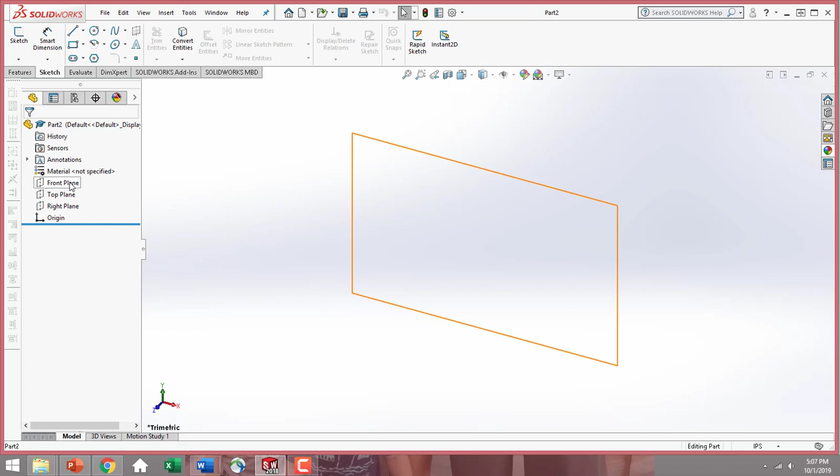So to begin, go ahead and open a new part document. Make sure your part window is in inches. Our instructions say we only need a 2D sketch, so we're not going to create an extrude feature from this. We're just sketching it. But we do need a sketch on the front plane. So go ahead and select that front plane and bring it normal to. Remember, always bring your planes normal to you so you're looking and sketching perpendicular to the plane.

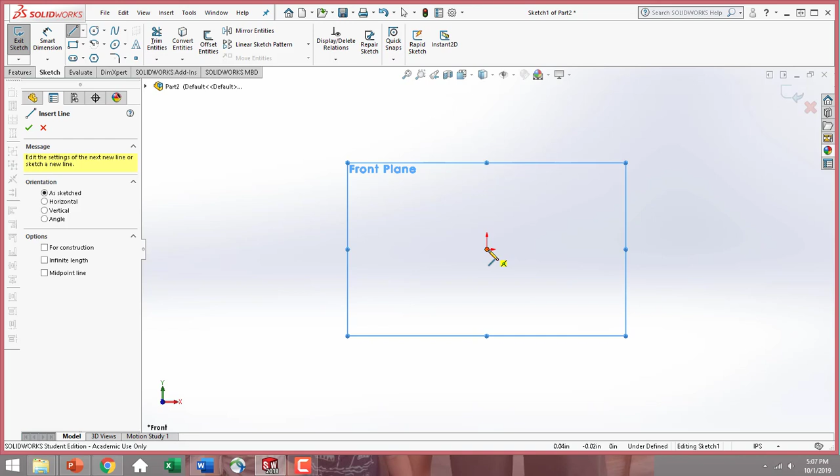Go ahead and open a new sketch, and I'm going to just select the line segment. Remember to always sketch from your origin so you are connected to a point in space. So I'm going to begin by just sketching a straight line here. Then I want a tangent arc. Instead of selecting a new sketch icon, I'm just going to do the shorthand. So bring my line segment back to that endpoint and then around, and I get that nice tangent arc.

I have another straight line up here, and then I need one more tangent arc, and then I'm going to stop with the sketch. Make sure they are going in the directions that you want. They don't need to be perfect at this point though. Now I'm going to go back to my line segment. So I just made the basic outline sketch of the top of that handle. So go back to your line segment, click down.

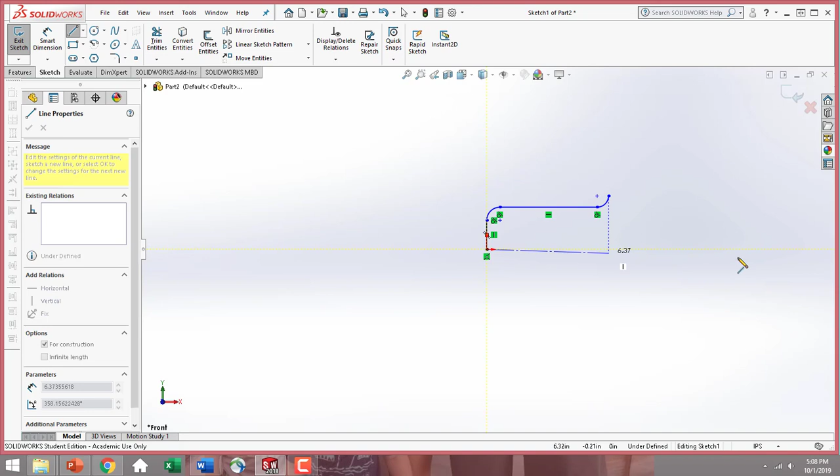Instead of selecting the line that we've been using, this would be referred to as an object line. It gives us these nice solid lines and creates our actual sketch. We're going to select center line. You'll notice when I place it down, I'm going to just connect it to my origin and bring it straight out, kind of to here, because I'm going to utilize the endpoint of it later on. But you'll notice that it has just dashes. This is our center line or construction line that we can use as a reference point.

Having it within our sketch is not going to affect any of our sketch relationships, or if we wanted to extrude this part, it wouldn't affect any of those features either. Whereas if we were just using that solid line that I used to outline this top of the handle and the rest of the part, the object line, if we put it in the center and then try to create an extrude feature from it, we would have a problem because we would have intersecting contours then, a sketch within a sketch, which you cannot have.

So when you need a reference point or reference geometry, you always want to use your construction lines or center lines because you can reference dimensions from them and how other lines lay and add in relationships, but they don't affect the overall feature or design of the part. So once we have our basic beginning outline and our center line, make sure that you have all these relationships that are showing up. So you should be connected to your origin, so have a coincident relationship from the endpoint of one of your lines. It doesn't have to be your straight vertical line. That line should be vertical.

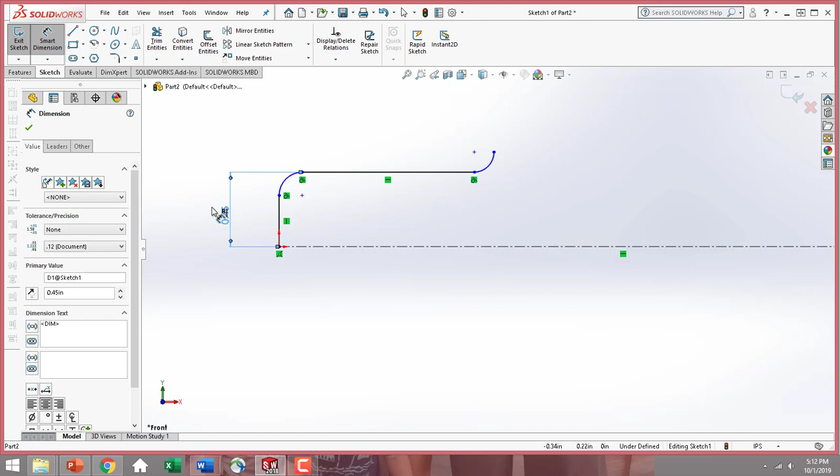Your dimensions do not have to line up the way that they do on your drawing. If you want them to, you can come over here on your Dimensions tab, go to Leaders, you can do a custom position and change that so they are lining up correctly. You can change how your leaders are displayed, but we'll get more into that when we start doing our drawing and documents.

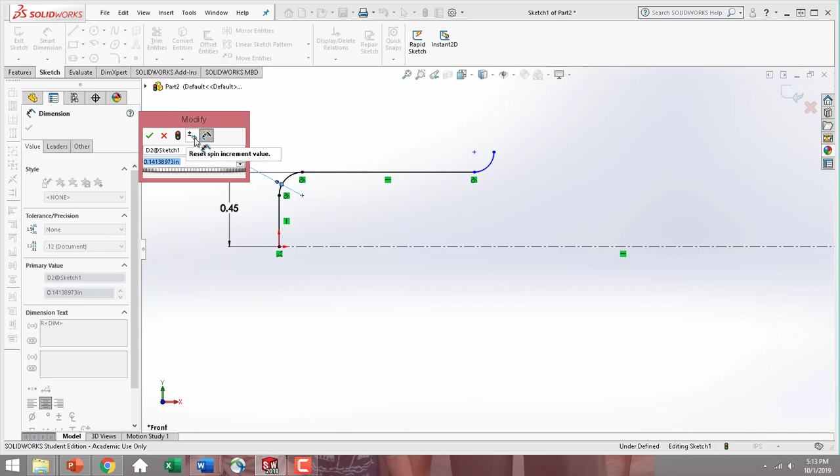Next, I'm going to dimension this top arc, which I can read from the shorthand 2 times the radius of 0.22, that both my arcs here are going to be the same, so it's going to be 0.22. So this bottom arc that will eventually be here will have the same radius. Then my inner arc right here has the radius of 0.15. So far I've just dimensioned what I have

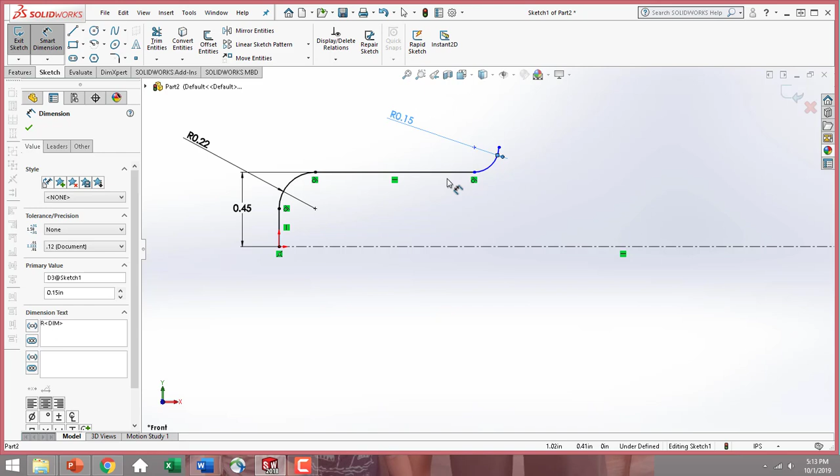sketched. So I'm going to come up here to my circle sketch icon. I'm just going to place 2 circles. Make sure your midpoint is on that center line just so you don't have to add in another relationship because we're attached there. I'm going to add in one relationship where I hold the control key down, select both my circles, and have them be equal to each other. So now I only have to dimension one. So I'm going to smart dimension. The diameter of these circles are 0.60.

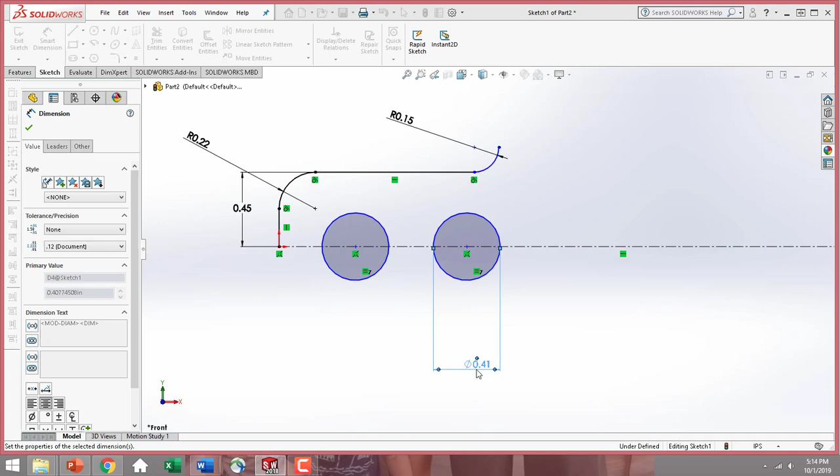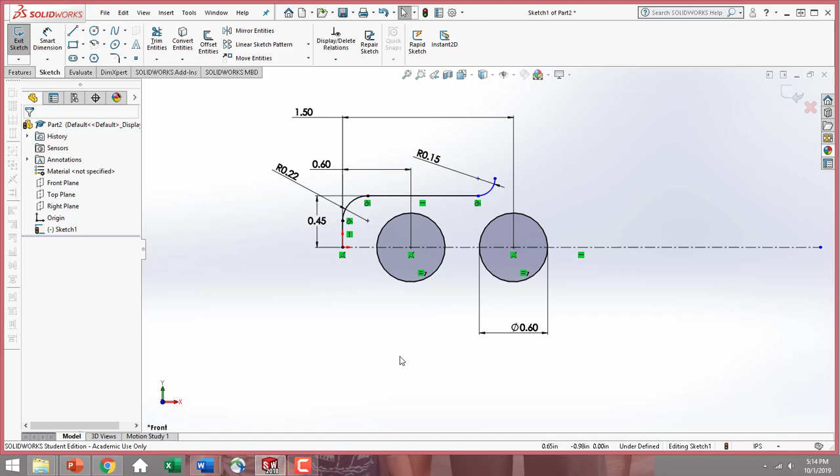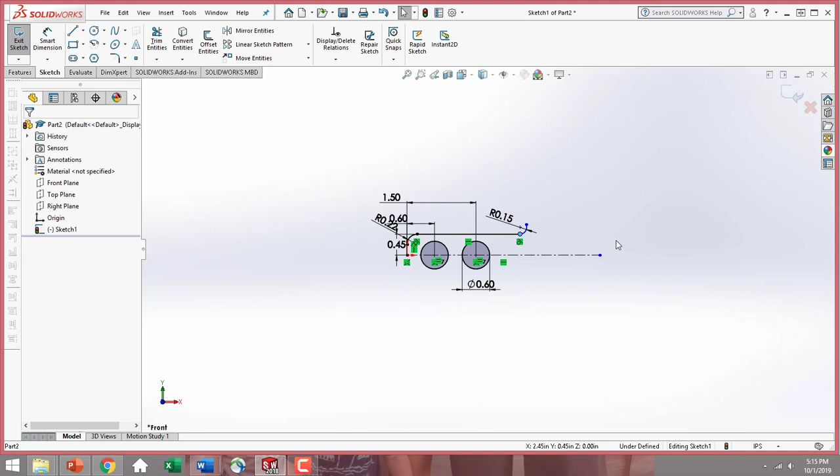Next, I'm going to dimension from the midpoint to the end line segment. This gives me that dimension of 0.60 as well. The midpoint to this end line segment is that 1.5. I'm going to hit OK. Since I know that this line segment comes out further, I'm going to just drag it out. If your curve gets too crazy, you can just bring it back around. It's not a huge deal right now. So far we're looking pretty good. I'm just going to zoom out so we can see a little better because now I'm going to start adding in my arcs.

Okay, so we technically have 4 arcs. You can see this tangent curve. It kind of looks like it goes into a straight line, but then in our drawing we see another arc right about here in the end of that handle. That is just showing that we're actually using a center point arc right here. So this tangent line goes into a center point arc and then tangents around. So I'm going to add in all my center point arcs right now. So go to your arc icon, go to center point arc. Now you can see when you're choosing your arc type, it shows you what points you're going to list first. So we're going to select where we want our midpoint and then our 2 endpoints.

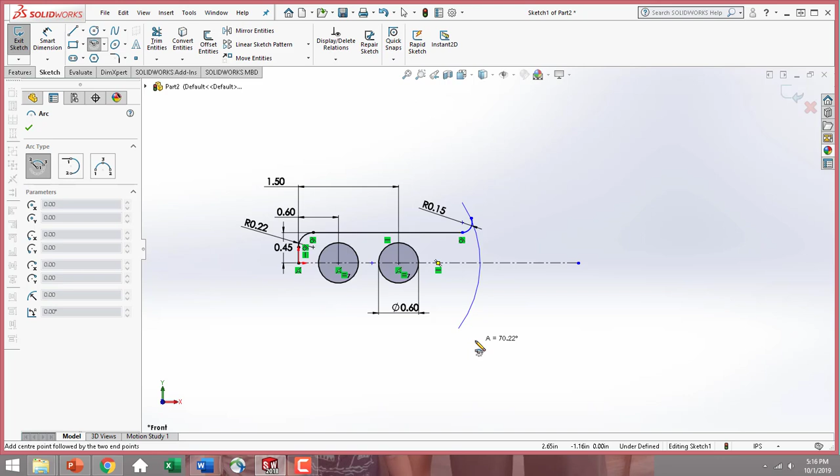So in this picture of your homework, all your radius and other dimensions are calling out your midpoint, which appears to be about right here in between your 2 circles. So I'm just going to select that down. Now I'm going to start with just this first line segment. So I think it's about right here, and then it's going to come around. So that's that arc I was talking about that kind of looks like a straight line. Now our second line segment, I'm going to go back to that midpoint and I'm going to use this for my midpoint on all the arcs. So now this is going to be the bottom arc on this interior cut.

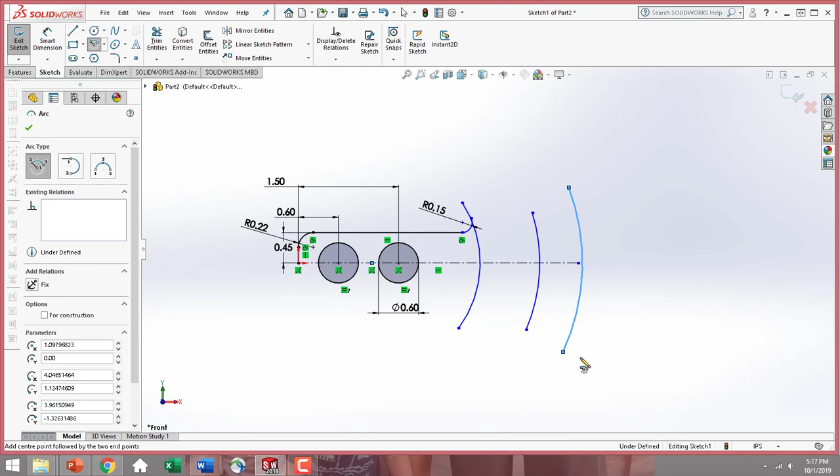Once again, go back to that midpoint. This is going to be the top arc on that interior cut. And last, go back to that midpoint, and this is going to be the top of our guide support. See how it wants to go backwards? You want to make sure that you're coming in the right direction. And hit OK. So now we have all 3 of those arcs. So make sure your midpoint is coincident with your center line, which it is.

Now we want to make sure all of our midpoints for these arcs are coincident with that line as well. So just hover over where you think they're going to be. SOLIDWORKS will automatically have them pop up. Hold down Control, select that center line and hit coincident. Then hit OK. We're going to do that for all 4 of them. So go ahead, add in that relationship.

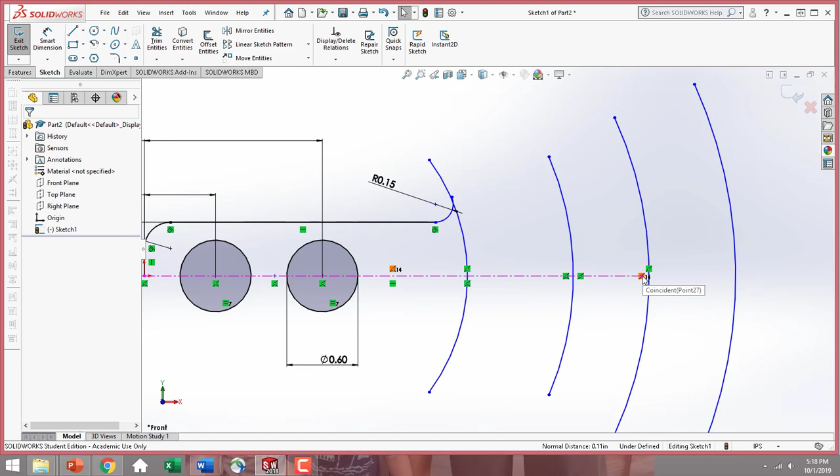You can drag out your center line if it is shorter than you want it to be. And for this one, I'm actually going to have the endpoint of my center line be the one that becomes the coincident relationship to the midpoint of this final arc.

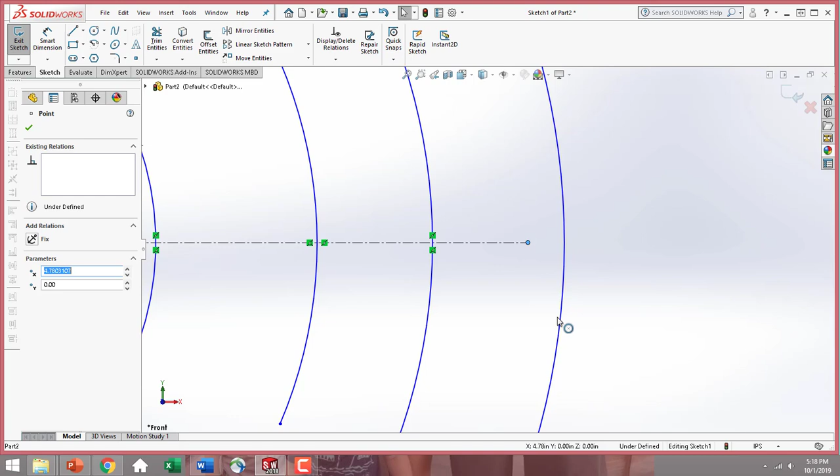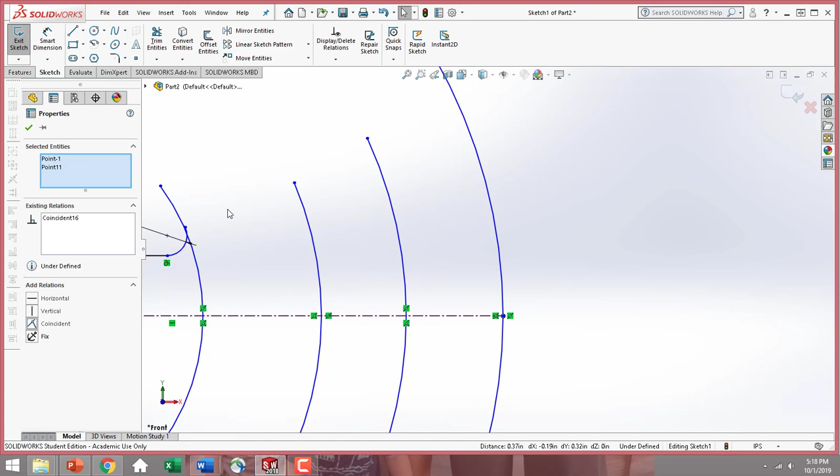Make sure you select the arc. I kind of have two arcs going on because I accidentally copied it, so make sure you don't do that. Select the midpoint, the end point of that center line, make them coincident, it snaps together. Just because it's cleaner, and now we can add in different relationships as well.

So we also want to connect the endpoint here to this bottom arc. So you can grab the endpoint and drag it and wait for that relationship to kind of pop up like it is, like SOLIDWORKS does. Hit OK, and now we don't have to add it in, but we are connected there.

Now you can come up to your Trim Entities tool. This is really handy for things like this where we needed an arc. So you can select the down arrow, go to Trim Entities. I'm going to use the Power Trim option. Then I'm just going to swipe through the line I want cut and hit OK. So it gets rid of that, but now I still have that nice arc coming up to my tangent line.

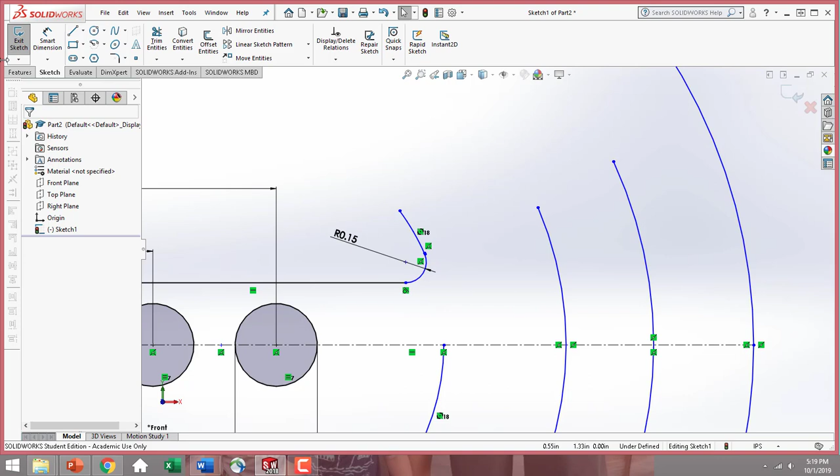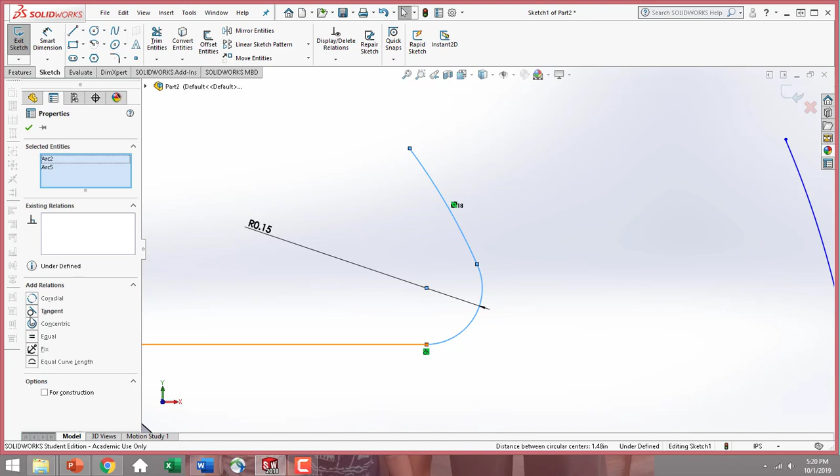I also want to make sure that my endpoints match up. So you can do that by zooming in, and that this arc has a tangent relationship to the arc we just cut. So add in that relationship as well. It's going to be tangent just so it always has that nice rounded curvature.

So you should have something that looks like this right now. Don't cut this line yet. So I'm hooked to my center line all the way through. I have all my arcs attached and everything's lining up nicely.

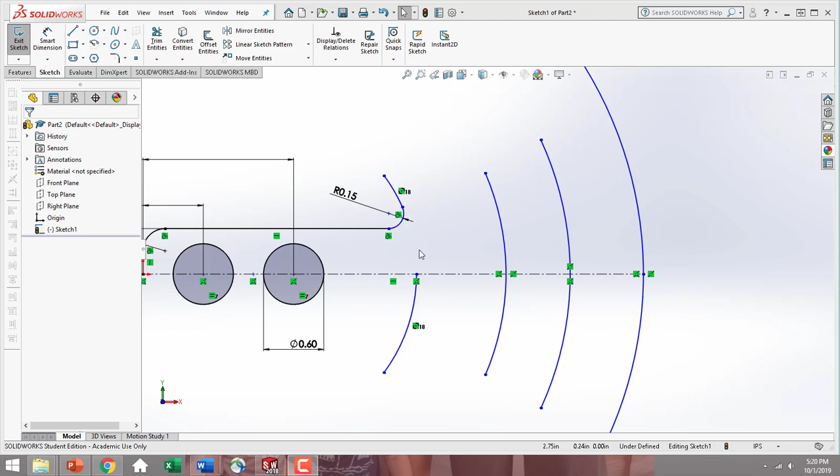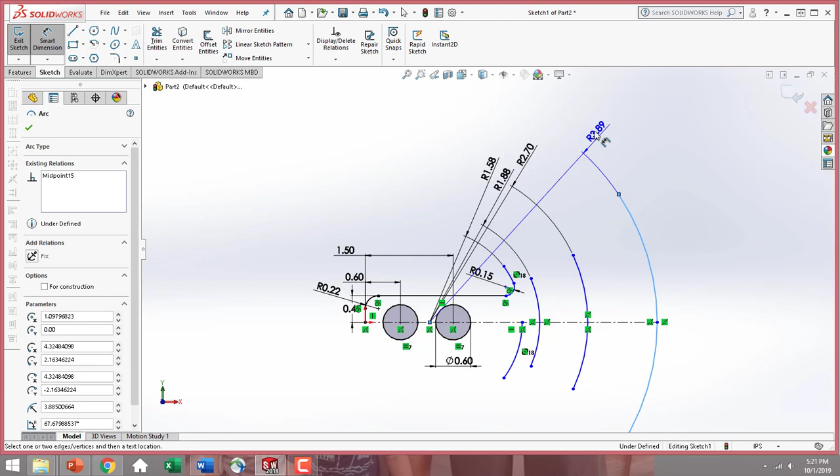Now let's go ahead and add in the dimensions of these arcs themselves. So I'm going to start with this bottom one. Its dimension is listed as 1.58. My middle is listed as 1.88. The top of that interior cut is 2.70. And then the final arc we have as 3.89, and hit OK. So now you can see everything's lined up neatly.

Go ahead and select all 5 of these arc lines now, since we already trimmed that away, and make them concentric to each other. So that means that spacing is always going to be equal, and hit OK.

Now I'm also going to add in one more construction line. So I'm just going to select my center line again. I'm going to draw it from that same midpoint I've been using. And this time I'm going to bring it up to about here. And just place it down. This is going to come into play when I finish up my interior and outside line segments, and how I'm going to put in that 30 degrees.

So let's go ahead and grab our line segment, and I'm going to start with the outside here. So hit that endpoint. Remember, we need another tangent arc here, so go back to the endpoint, create a tangent arc, then we have a straight line, then we have another tangent arc connecting them.

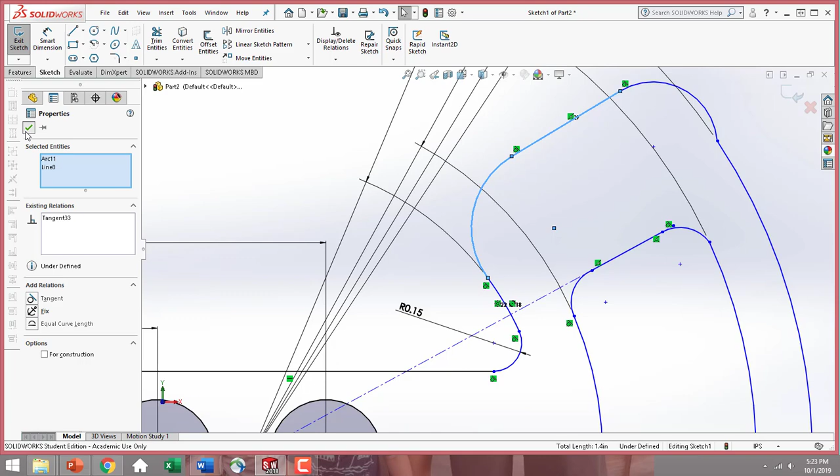So zoom in, and we're going to start on the outside. Make sure we have a tangent relationship on both sides of the arcs we just put in. So I need one on this side, so hold the Control key down, select both those line segments, select your tangent relationship. I'm going to get rid of this coincident relationship that SOLIDWORKS automatically put in. Sometimes we don't need the automatic ones. So we don't want to have any that we're not really paying attention to because it will mess this part up.

Okay, I have a tangent relationship here. I need one on this end, so select both those arcs this time, hit tangent, and OK. So you can see that flows smoothly together. I need to do the same thing to these interior arcs. So I'm going to add in a tangent relationship here, and one between these two top arcs.

Now that I have this line sketched, I'm going to add in one more relationship. I'm going to select the solid line I have sketched here, hold down my Control key, and select the center line. This time I'm going to select the collinear relationship, so those lines lie right on top of each other. You can also move your endpoint down to connect to this endpoint, just so you have a cleaner line.

I'm also going to add in a relationship between the outside straight line segment and my interior straight line segment for those two lines to be parallel with one another, and hit OK.

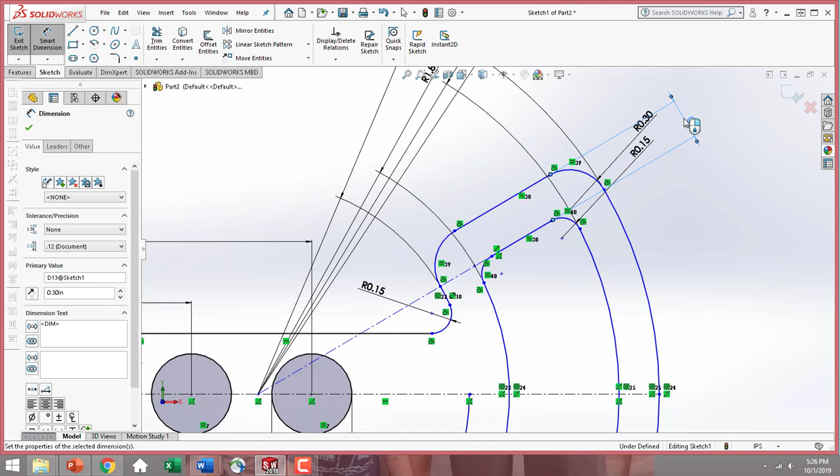Now I'm also going to Smart Dimension the width between these two line segments. Remember, you do need to make them parallel before creating this dimension, just so the dimension comes out straight and not at an angle, and is the true width. And this width is 0.30. You can read that on the bottom homework. Okay.

So you should be attached as well to that center line by the arc endpoint. So if it's not, you can select it, hold down Control and select that center line, make the coincident relationship. I already have it connected, so it's saying I'm over-defined.

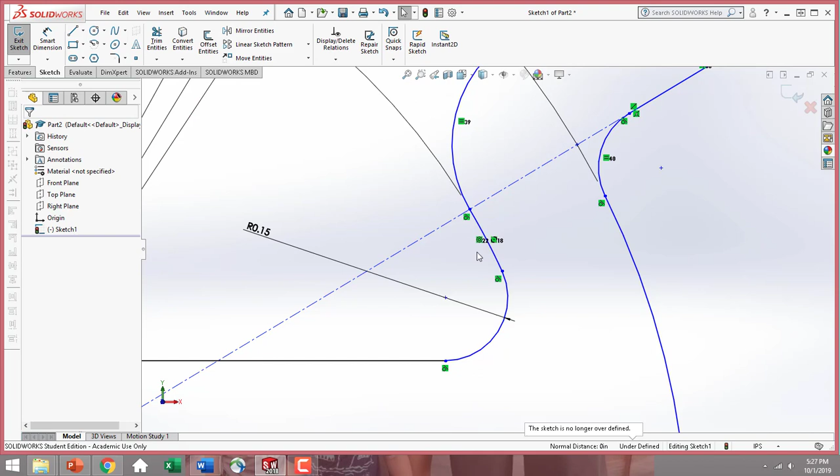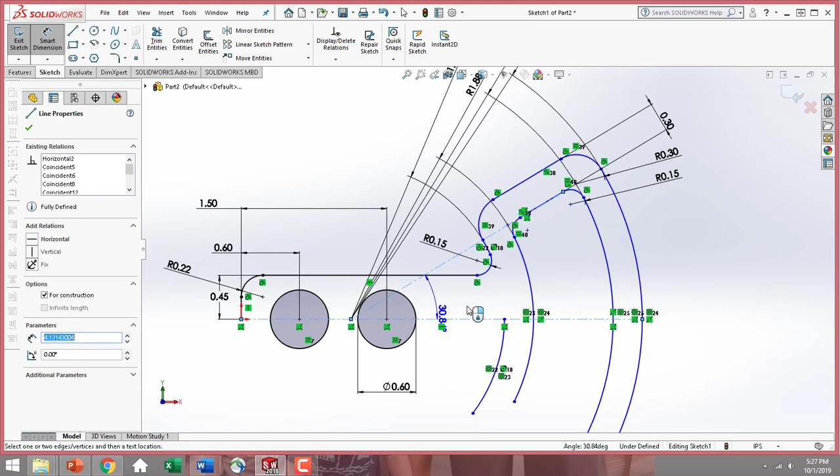So now we want to add in that 30 degrees, and that's where our two center lines are going to come into play. So go ahead and go back to your Smart Dimensions. Remember, when adding in an angle, you need to select the two line segments you want the angle in between. So select both of your center lines and drag that out. It's going to be 30 degrees and hit OK.

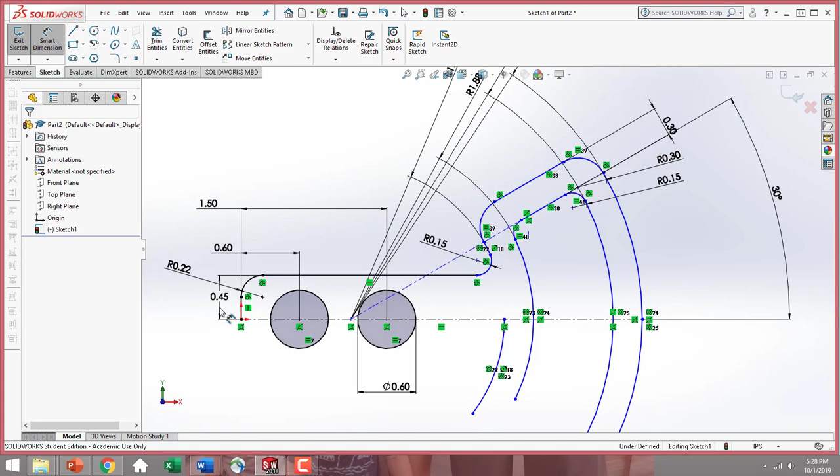So in the beginning, when we started dimensioning our circles in the first part of our handle, we left off that 1.12 dimension. Let's go ahead and add it in. So go back to Smart Dimension. You can zoom in. We're going to dimension the midpoint that we've been using for all these arcs to the end line segment. Remember to select the line segment and not the midpoint of it, because you'll just be in trouble then. This dimension is 1.12.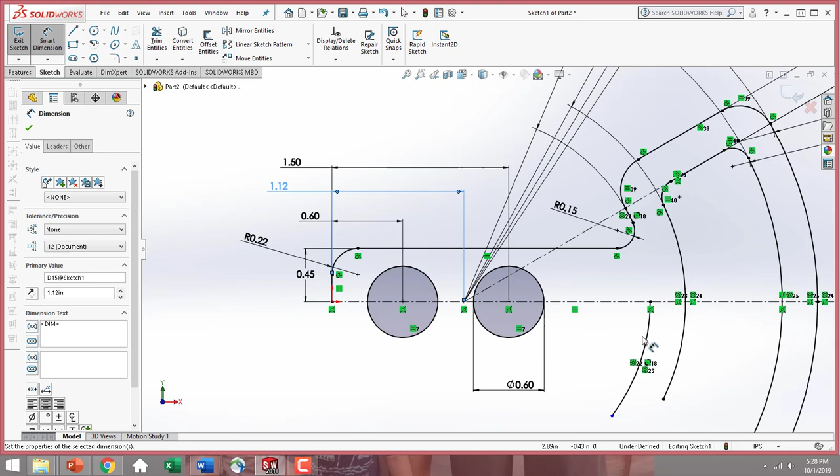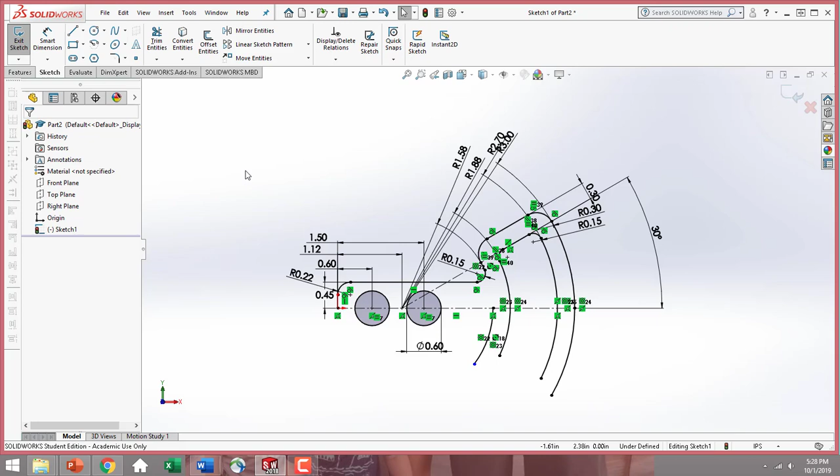And hit OK. So if you're reading from the left over on your homework, you'll see we have all the dimensions that have been given to us. By adding in that 1.12 dimension and giving my midpoint placement, the rest of my drawing has now become fully defined. So now the cool thing, we only had to draw one side and dimension it all. So let's go ahead and mirror it.

So go under your sketch tab, go to your mirror entities icon and work your way down on your feature tree manager. So to begin with, what entities do you want to mirror? So I want to mirror this straight line, my arc. I'm just going to go around the whole outside of my part. I do not need to mirror this line, however, but you can if you'd like, because I do have it still here.

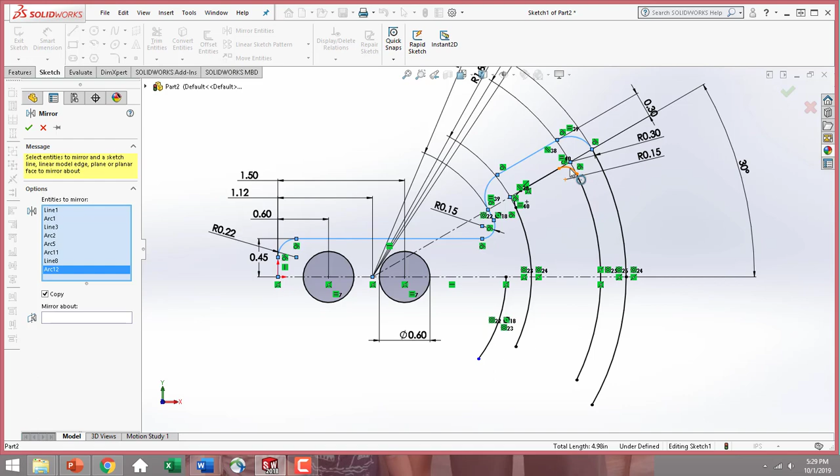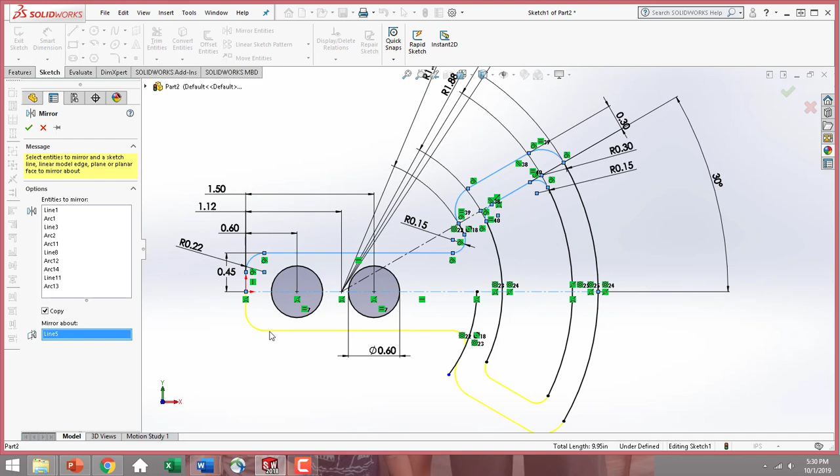I'm going to select it just so you guys can see. I don't need to select this outer line or this line because they both go to each side. I'm actually going to unselect that. So you can see I've just selected all these top outer lines besides the arcs I've already created. Now mirror about. This is another point where your center line comes into play. So select your mirror about, select that center line. You'll see just a preview of where those lines are going to be and hit OK.

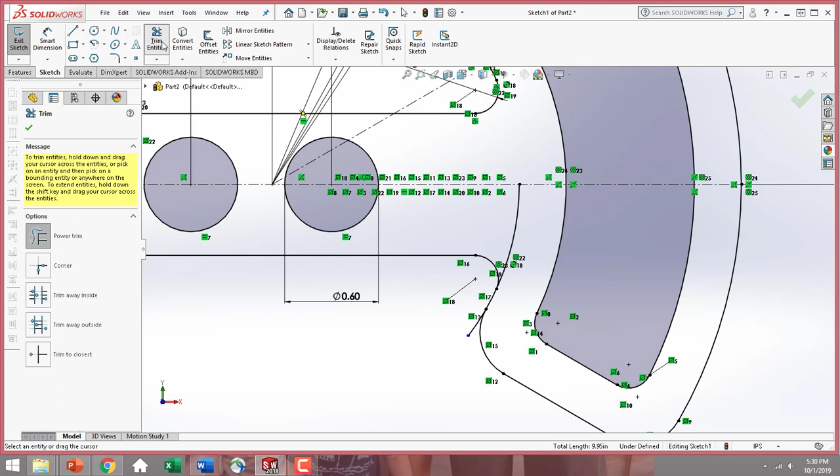Now you get all these crazy squares pop up for relationships. That's just showing that we did mirror those entities. So come back in because we do have these extra lines. Go to your trim entities icon, select it, make sure power trim's there, and just drag your mouse through these extra lines. And now we have a nice clear sketch that's fully defined. You can read on your status toolbar that it is fully defined.

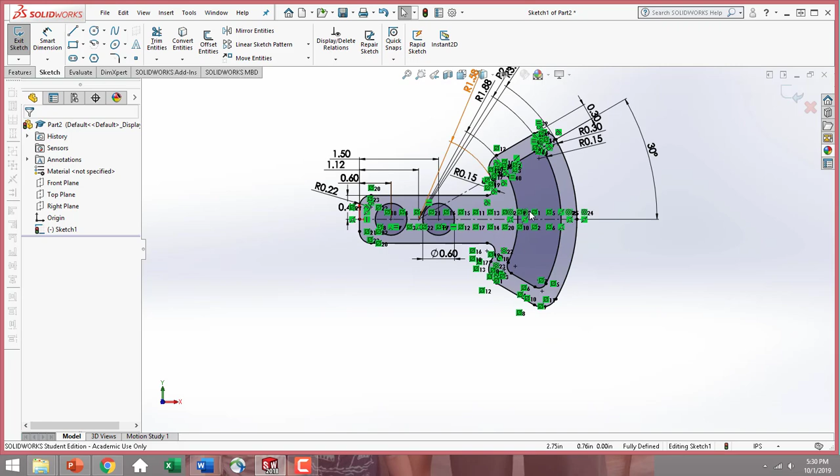There is nothing blue. If we were to create a feature, we could extrude this base, say 1/4 of an inch, and hit OK, and look just like our homework part.

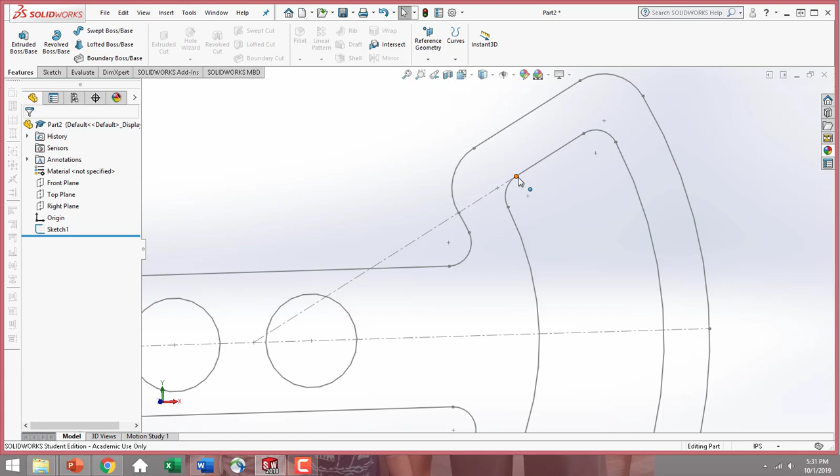Also, make these lines parallel to one another. Make sure that center line is attached to the endpoint of the first arc we put in, as well as the endpoint to this tangent line, because those also need to line up and have that 30-degree relationship too, to give it that symmetrical look.